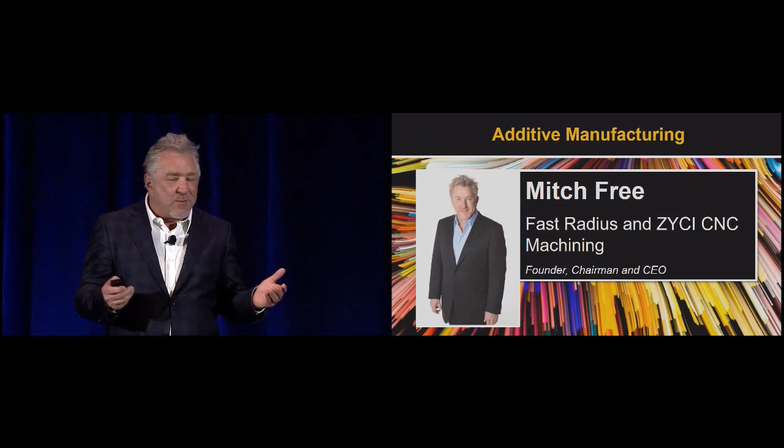Then I thought, what do I want to focus on now? It was tempting to go do another software as a service or marketplace type business, but I felt like making things is a really interesting opportunity right now, especially if you were to start from scratch and do it in a very digitally connected way, natively. So I started two different companies, and I'll touch on why they're different in a moment. One does just CNC machining with low volume, very fast lead times, very fast quotes, fast execution. The other, Fast Radius, is focused on additive manufacturing - that's what we're going to touch on primarily now: the state of additive manufacturing, 3D printing. Where is it today? Where's the hype? Where are we in the hype cycle? We'll run through that.

So we're at a really interesting point. By the way, I use the word 3D printing and additive manufacturing interchangeably. In the industry, we think about additive manufacturing because we're adding material to build a part, to grow a part of something. In machining and traditional manufacturing, we're using subtractive manufacturing - we're taking a block and subtracting away from it.

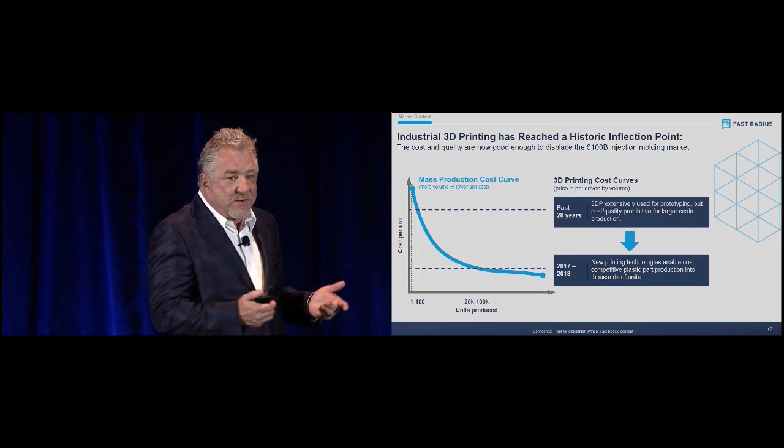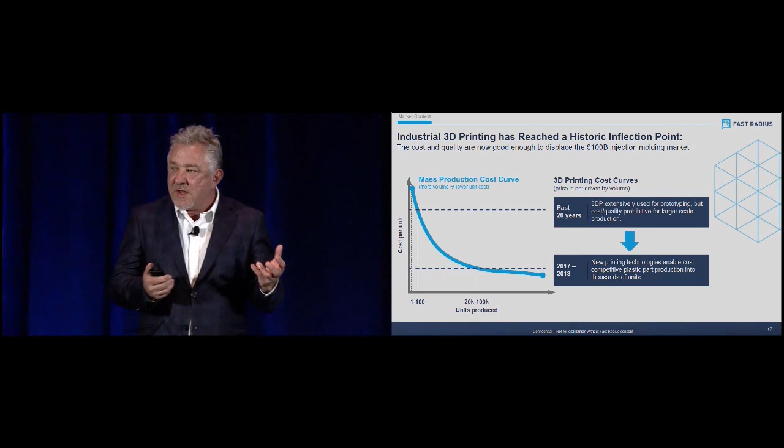Now, 3D printing is not new. It started in the 80s, and it's been a long, slow evolution with a number of different technologies and use cases. It really began with just doing prototypes that weren't so dimensionally accurate, weren't very structurally integral. But it was awesome - for the first time, you could actually hold a physical part in your hand without having to tool up for it.

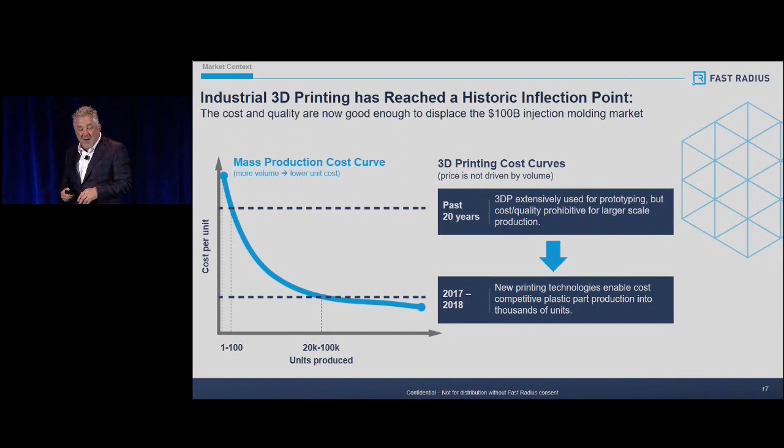So lots of different technologies emerged through the years. Fused deposition modeling is one - there's a filament, almost like a wire of plastic, coming through a spool, through a nozzle, and it extrudes into a 2D pattern, building layer upon layer to build up a part. This technology is very mature and makes very dimensionally accurate, strong parts, but they're not cosmetically beautiful. We can do parts that are very tiny with this technology, all the way up to parts that are 1 meter square.

Interesting example - there's two use cases I'll talk about. One is for a large computer manufacturer making specialty servers and server racks, and we print custom brackets for them. They don't care that it has a shiny surface finish or a certain Pantone color - it just needs to be a strong bracket. On the opposite end of the spectrum, we just printed a lot of large parts for a company that builds special aircraft for military operations. They were building an airplane and needed to do it really fast, and things like gearboxes and APUs that would go in there were long lead time items. But they wanted to keep building the airplane, so we printed replicas of all the avionics boxes, gearboxes, the APU, and they used those to drill the mounting holes, run the wires, run the tubing, run everything. Then 6, 8, 10, 12 weeks later, when the real part actually comes in, they take out the 3D printed one and plug in the real one, and all the plumbing and wiring is already done. Interesting use cases - so FDM is a key component.

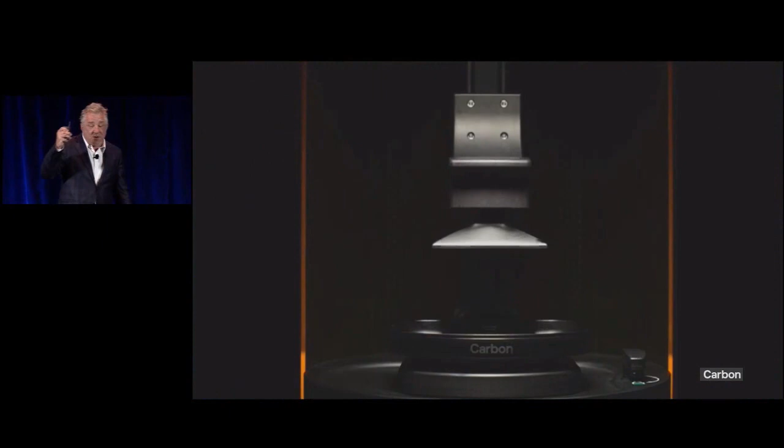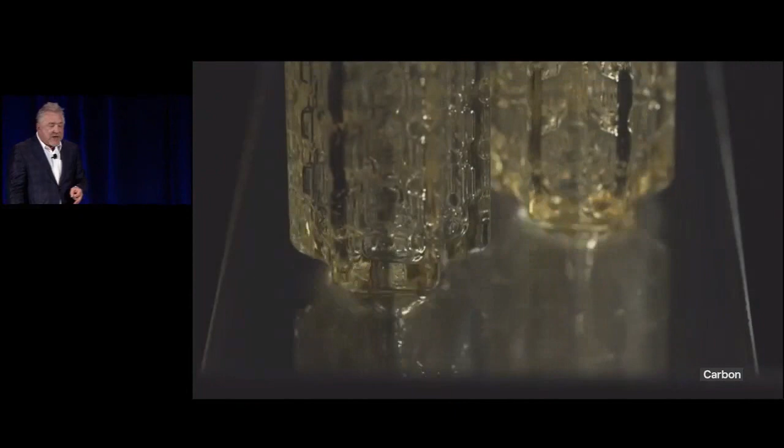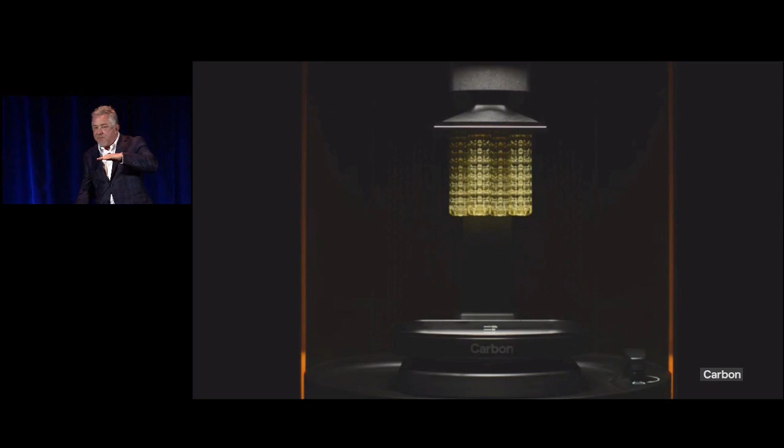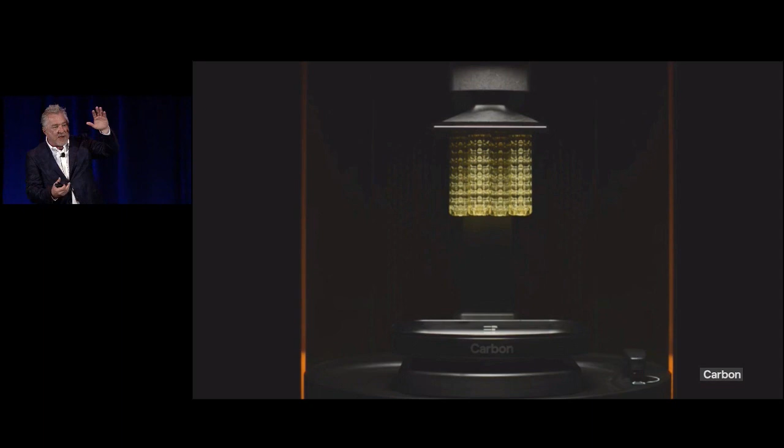One of the newer technologies we're using today is from a company called Carbon, and this is digital light synthesis. It's pretty incredible - what's happening is you put a liquid resin into a small tub with a piece of glass, and through the bottom of the glass is a projector that takes the 3D CAD model and slices it into tiny slices. Every time that projector pulses through the glass, it hits the resin and solidifies that layer. So it's constantly rising - it looks like Star Wars, like you're just pulling a part out of a pool of liquid.

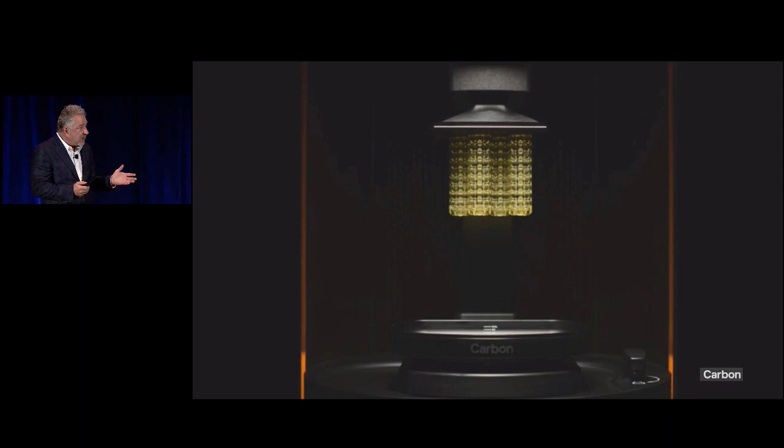Very interesting. The surface quality is incredible. It looks like an injection molded part. And the properties, after this, it does go into an oven through a baking cycle for a couple hours, but at that point, you get properties that are akin to injection molded parts.

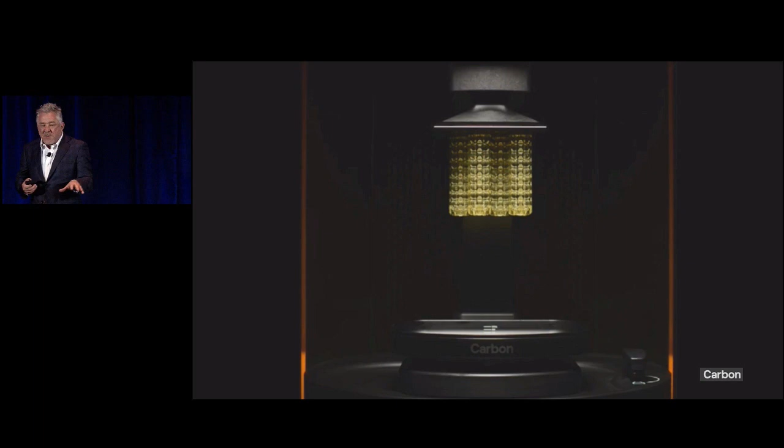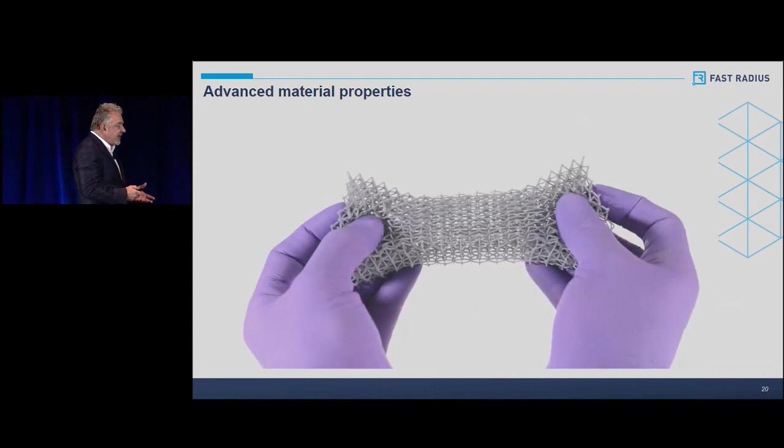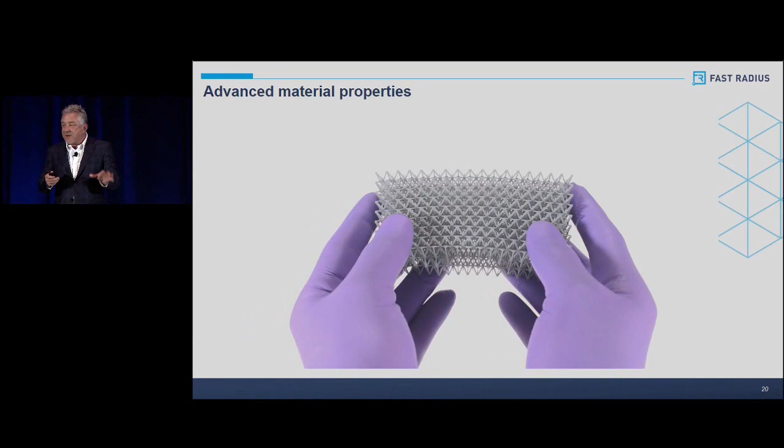So we're really competing with low volume injection molding here. This is some of the materials we can do on that machine. Not just rigid plastics or high temperature plastics like Ultem, but we can also do rubber, silicone, flexible parts, print special seals. So this is all building up to a really interesting supply chain story.

So other use cases that are happening: this machine I just showed you and that flexible material, this is where Adidas is using it to print that sole on the shoe. They're able to print it as a lattice structure, because one of the benefits of additive manufacturing is you can print things you cannot make any other way due to geometric complexity. The way that shoe sole is made, you couldn't mold it, but it's engineered with this lattice structure to be an incredibly comfortable, shock-absorbing shoe.

That technology is also being applied into other places and other things that have impact, which I think you're going to begin to see in the near future, and things that could never have been traditionally injection molded.

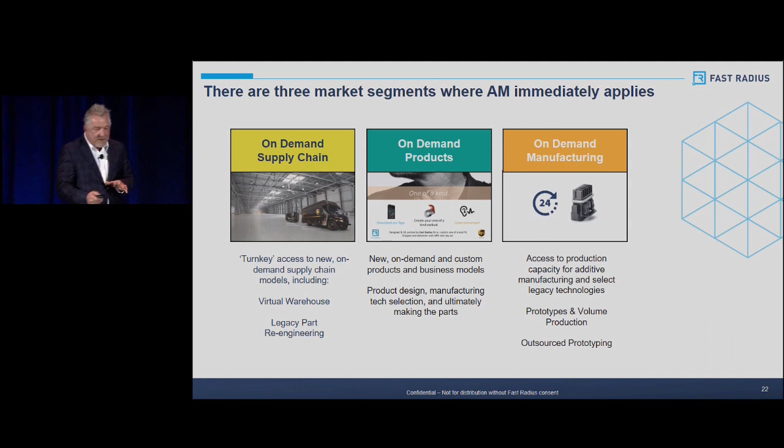So there's really three segments where additive manufacturing is taking off: on-demand supply chain, on-demand products, and on-demand manufacturing. So we'll talk first about the on-demand product.

You may have noticed on our slide that UPS is part of this 3D printing business. UPS is our partner in the business, they own part of the business. And you might think, why? Well, one of the theses when I first started Fast Radius was I wanted to be near a major logistics hub, so that I could make parts until the last minute and still get it on an airplane somewhere for next morning delivery.

So I talked to the major logistics providers here in the US, and UPS, trying to figure out where to locate. UPS, I figured it would be Louisville. I started talking to folks, and very soon I was invited to a meeting with the very top people at UPS and learned that additive manufacturing and digital supply chain is very high on their strategic radar as a company. A couple of the comments I heard from their executives were...

Back when fax came along and people stopped shipping around documents for signature, it impacted their business. There's something happening here that is analogous, but it's in physical parts this time. And UPS, being thought leaders, said, we see this coming, and we can be the bug or the windshield, and we choose to be the windshield.

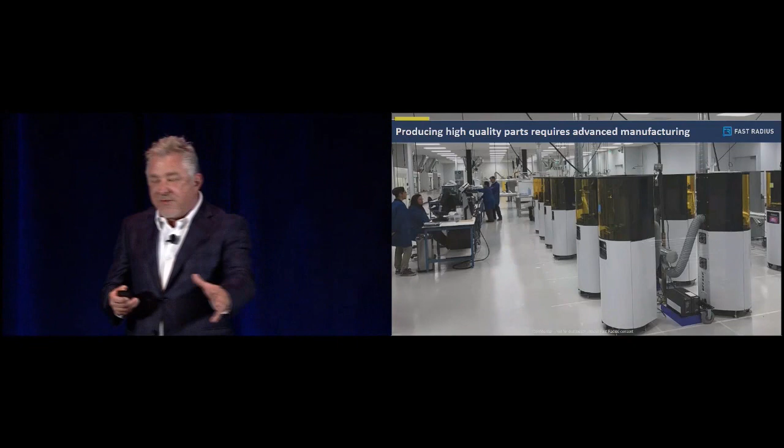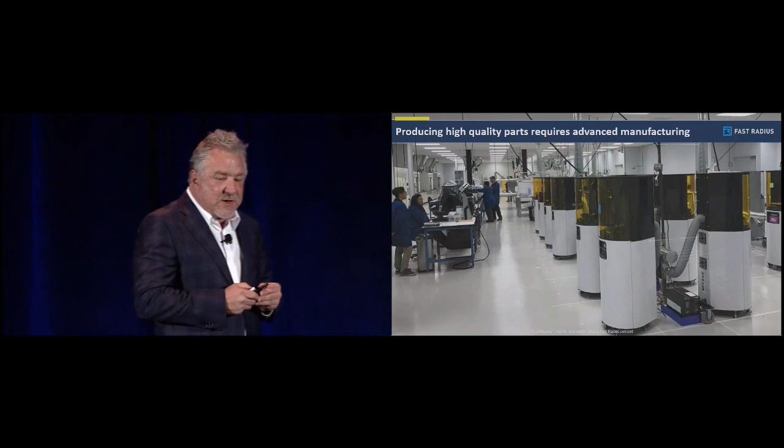And producing these high-quality parts is advanced manufacturing, it's digital. This is what the factory looks like with the machines from Carbon. The company is called Carbon, the parts are not carbon fiber, so it's a bit of a misnomer there, I want to clarify that. But what we're looking at is a clean environment, and these things are running pretty high speed compared to anything you've seen with printing before. It's injection mold quality, and the amount of parts these can produce in a day is pretty mind-blowing, especially given the quality. It really does rival low-volume injection molding. Now, where we're seeing use cases today is low-volume, high-value products.

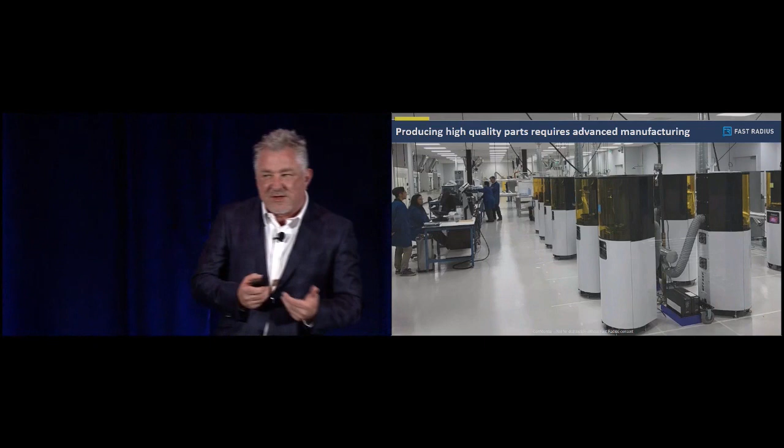Medical device companies—we're doing cases for companies that make specialized small equipment, where they may make 500 or 1,000 units a year. People with high-value, low-volume products where there's a high risk of change and design iteration, you don't want to commit to a tool. That's the type of people we're seeing here.

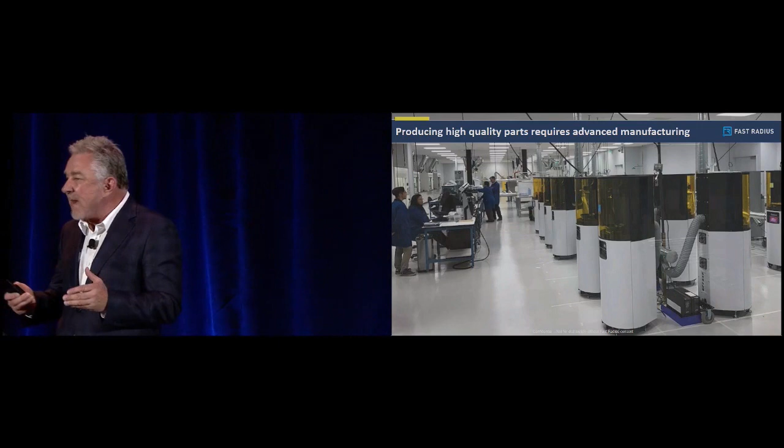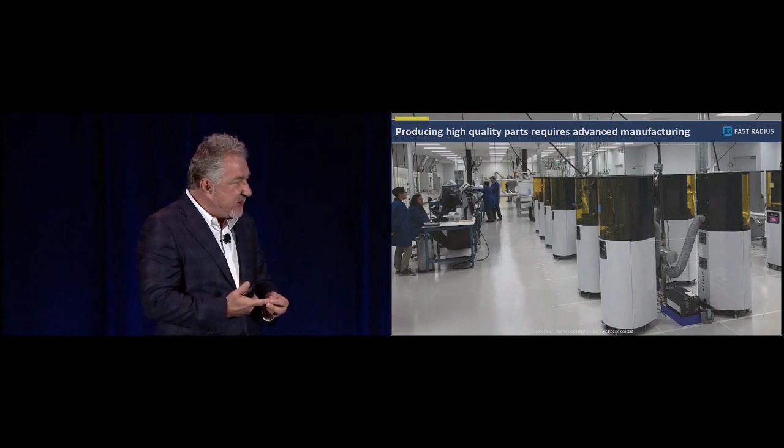We're seeing people doing interesting geometry challenges, like microfluidic chips, where you can print channels through a part. You can only drill a straight hole, but when you print it, you can create channels that curve, intersect, and combine liquids—very big in the medical industry. These are the types of customers we're running production for.

Now, as we talk about on-demand manufacturing and digital virtual inventory, it becomes really interesting with UPS. They're a global company with major hubs around the world, and I think about 900 forward or field stocking locations worldwide where they strategically hold inventory for customers.

Now think about the day when we have high-end additive manufacturing equipment in these 900 locations around the world, and we've assembled a global manufacturing cloud that can react very quickly to digital virtual on-demand inventory requirements. We think that's pretty special. It doesn't happen overnight—this is going to take a while to build out.

At this moment, we're in Louisville, Kentucky, and in Singapore. Europe is coming soon, and we'll just continue to build that out. We don't want to get too far ahead of the technology, because new technology is coming very, very fast in this segment, particularly with metals and metals printing.

Plastic is getting really good. Metals is about to be really good. There are a few things we're playing with now that we have access to that are on the horizon—some game changers in metals happening.

So we think it's a lot of fun to help companies bring products to life, things to market that just weren't possible before. We have companies, when we show them the capabilities or when they get exposed to them, they become really excited. They start bringing back products they had designed but couldn't bring to market profitably because it was low volume or there was some complexity to it.